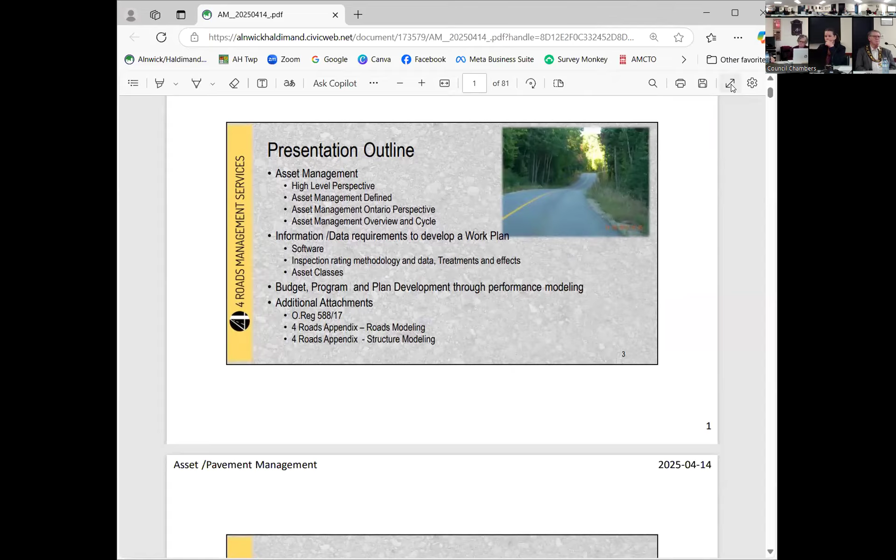Some municipalities I've done very frequently. I think Durham Region might be 17 times, Halton Region 15, Clarington 6 or 7 times, and so on. So the smallest municipality would be 4 kilometers, the biggest would be 2,000. So I've looked at and worked on all kinds of different sizes of asset groups. Dave, who would be your 4-kilometer municipality? A little place called Kerwood down in southwest Ontario, and I think it's still in Lambton County down there. And I was in Petrolia just last week, so they've been a client for a while.

So today we'll talk about a high-level asset management perspective, define it, look at our Ontario perspective, and we'll look at the overview and the cycle. We'll talk a little bit about software, and I know you've got software. Inspection, rating methodology and data, the treatments, the effects, asset classes, budget program, and plan development through performance modeling, which is really how do we develop a work plan and develop that work plan in accordance with Regulation 588/17. I've got additional attachments there, which I didn't send this time, but I can provide those. You've probably all seen O. Reg. 588/17.

And Dave, if you remind me, I'll send those other two. I might have sent those to you and Stefan earlier this year.

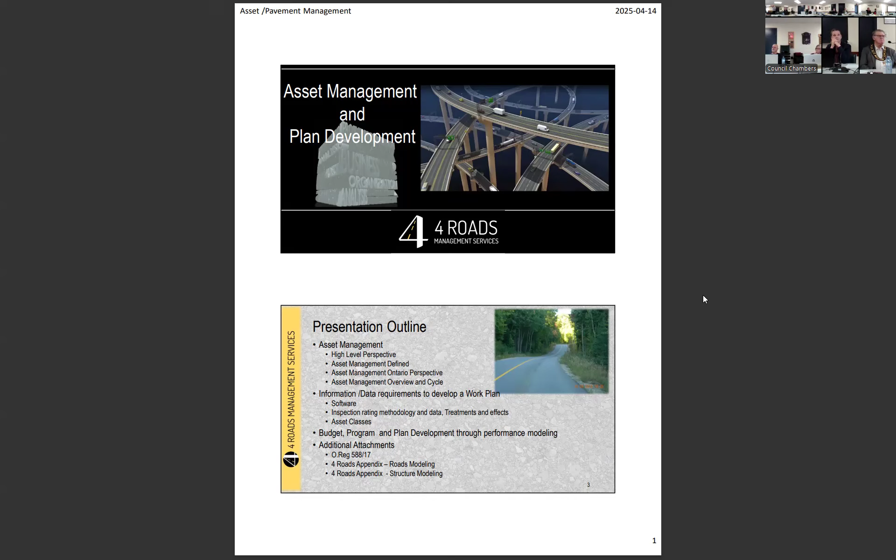So what do we do at municipalities? We are in the business of delivering services, and service delivery is dependent upon assets in good condition. So basically you have roads, bridges, water, sewer, rec facilities, offices, depots, ball diamonds and fields and things like that for soccer, fleet, parts, etc. So maintenance of good assets in good condition is critical to ensuring our service delivery, and almost every aspect of service delivery falls under that asset management umbrella.

So many different agencies have many different definitions, and at one point I had about 12 definitions in this presentation. I never ever read them all, but the point was just to illustrate the commonality between them. So I've settled on this one. It's from a while ago, 1999. Spoiler alert, there is nothing really new going on in asset management. All the theories, et cetera, are pretty much founded decades ago.

But the definition is asset management's a framework for making cost-effective resource allocation, programming, and management decisions. It combines engineering principles with sound business practices and economic theory, and provides tools to facilitate a more organized, logical, and comprehensive approach to decision-making. And even although that's TAC that's come up with that, this definition can be applied to any asset.

Of those 12 definitions that I used to carry, there were key themes to all the definitions. It was all about managing, being strategic, effective, efficient. For sure, it's about money, and lots of it, because this is public works, and even recreation facilities are fairly expensive. So it's about service delivery, optimizing our asset life cycle, and risk management on a couple of different levels.

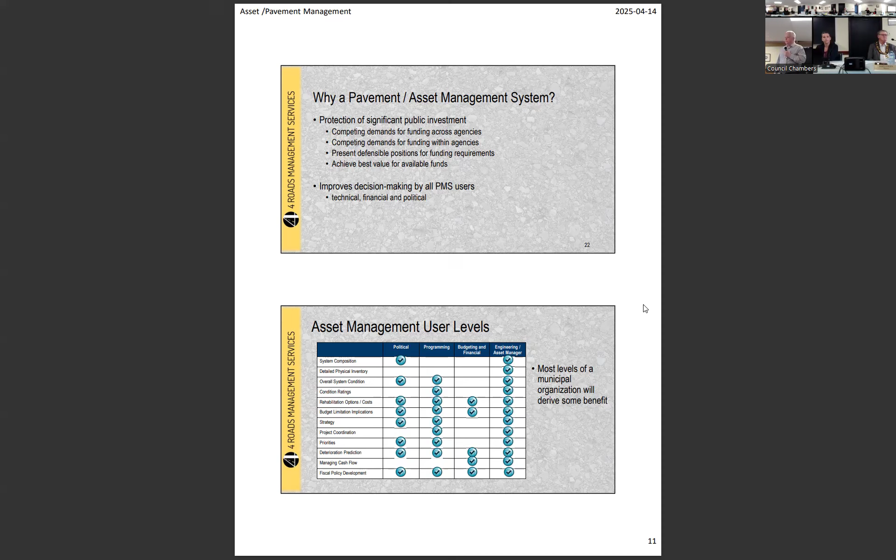So that should improve our decision-making by all pavement management system users, from a technical, financial, and political perspective. So asset management affects all of us in maybe different ways, whether it's political, programming, budgeting, financial, engineering or asset management. And we look at these details down the side: system composition, condition, strategy, coordination, all those things. So basically, most levels of a municipal organization will derive some benefit from having that system. Another spoiler alert, it does take a lot of hours to set up the system.

So the software that I use, just the deterioration curves and performance modeling part of it, I stopped counting at 120 hours. So that's how much effort has to go into a software that already works. And I did the same in another product called Deighton dTIMS, or people that work with me, we were doing it in parallel. The point being, it takes significant effort on this type of software to make it functional for your purposes.

Asset management is current and future costs. PSAB, you probably hear a lot about, and we talk about PSAB, and PSAB is completely different from asset management. If we looked at it, PSAB is looking backwards and historic, and asset management's looking current and forward.

If I looked at a tandem dump truck purchase, and Stefan's still here, he'll see that this number's significantly different than you pay now. I think you're in the 400 plus range, but from the vintage I prepared this slide, 250,000 made some kind of sense. But for simplicity, if we started to look at what that costs, we got our purchase costs, and we got 1,000 hours of use a year, 10-year life cycle. That makes the numbers easy.

It's $25 an hour for capital depreciation. At the end of that life cycle, there's $250,000 in reserve. That's a problem, because even with 2% inflation, it'll be worth about 305,000. So we're 55,000 short. So it just kind of reinforces the idea you got to have an equipment rate, and you got to have an appropriate equipment rate, and you got to adjust it every year to account for inflation.

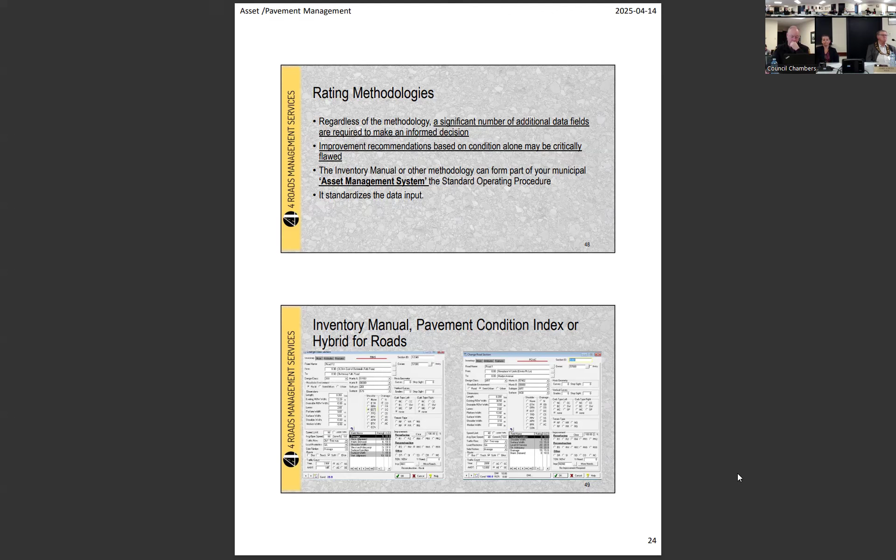And so we have the detail on the types of defects, and then I can put in the ride condition rating, and then I roll it backwards and it produces a structural adequacy, so I can enjoy the detail of PCI, but also have all of that other information, the lanes, the length, the width, what kind of curb I have, what kind of shoulder I have, all that kind of stuff. We need to have that kind of information to make a valid decision.

So if I use an example, and I know I'm harping on it a bit, if you had a PCI of 70, which would be a structural adequacy of 14, typically that's a range you do a resurfacing, but if the road's too narrow, it's a reconstruct. If there's no drainage, it's a reconstruct, unless you want to use just a single lift of pavement for a holding strategy. If there's a capacity need, then reconstruct with additional lanes. If the underlying data is all fatigue related, then a more significant rehab is required. If it's age related, it's a different fix. It's similar with structures. Asset management and improvement recommendations using a single parameter is critically flawed.

Here's a number of methodologies that are in use in Ontario. And PCI methodologies change with the surface type. So SP-021 is for surface treated. That's a generic pavement condition for municipalities. 24 is for hot mix and 25 is for gravel. So depending on the surface material, you get a different rating because different materials fail differently.

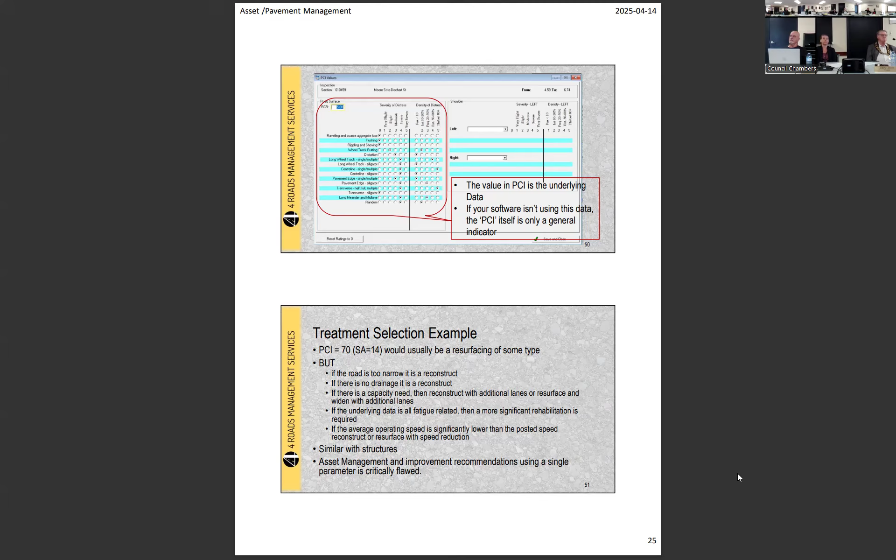So you have surface treated roads and you have hot mix roads. When you drive down the hot mix road and it's thump, thump, thump, you notice you don't really get those on surface treated roads. It cracks longitudinally. Hot mix cracks thermally. That's just physics in action. That's not a structural problem. That's not a bottom-up problem. It's a top-down problem. It's age-related. So that twigs in your mind. I don't need to fix anything under that. I just need to fix the surface material.

It's a prediction model. So if you have a road that's 6 to 10, what it's saying is in 6 to 10 years, it will be a broken road. That's what that means. So that interpretation gets confused a lot. It doesn't mean resurface in 10 years. It means it will be broken in 10 years. So there's quite a little bit of difference there. That is the language we're stuck with. People do have it in their heads, but when you put it up on a graph, you can see what it really means, right?

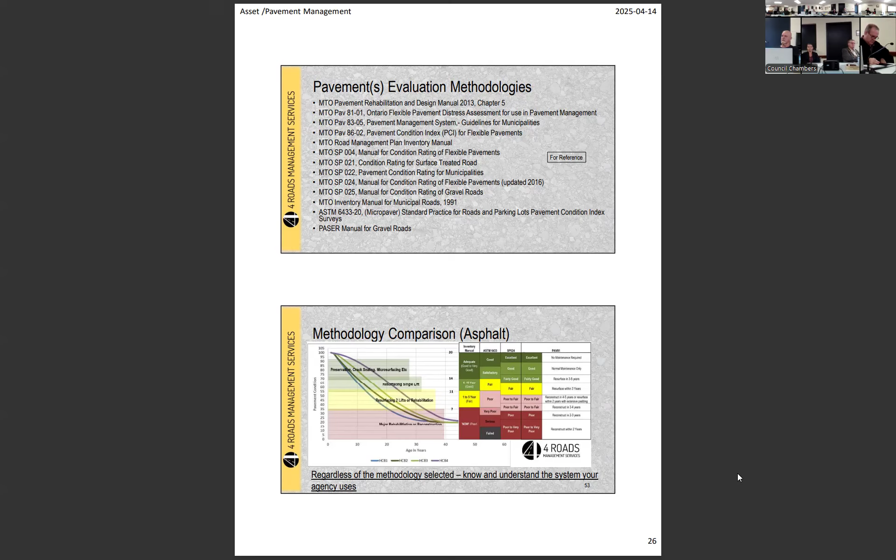So, methodology comparison: surface treatment, there's a few less variations there, and they're pretty similar. And there's 3 or 4 different gravel ones. This is what the inventory manual does, and it makes all kinds of sense to me. So basically at that top end of the curve, we're doing regrading and dust control. We get down a little bit, we're just going to add 75 mils.

Condition gets a little bit worse over a longer period of time, we're going to add 150. And when it gets down to here, if we've done nothing, then we've got to do something major, like add 300 millimeters of gravel. We use OSIM or MBADES. MBADES is like OSIM light, not used so much anymore, but we use that for structures.

Sadly, these are structures that I owned. I closed this one 3 weeks into Haldimand County. Somebody called me and said, Dave, I know you just inherited this, but you've got to look at this beauty. And I did. And there I am, January 20-something, standing under a bridge at 9 o'clock at night going, yes, indeed, somebody did try to burn it down.

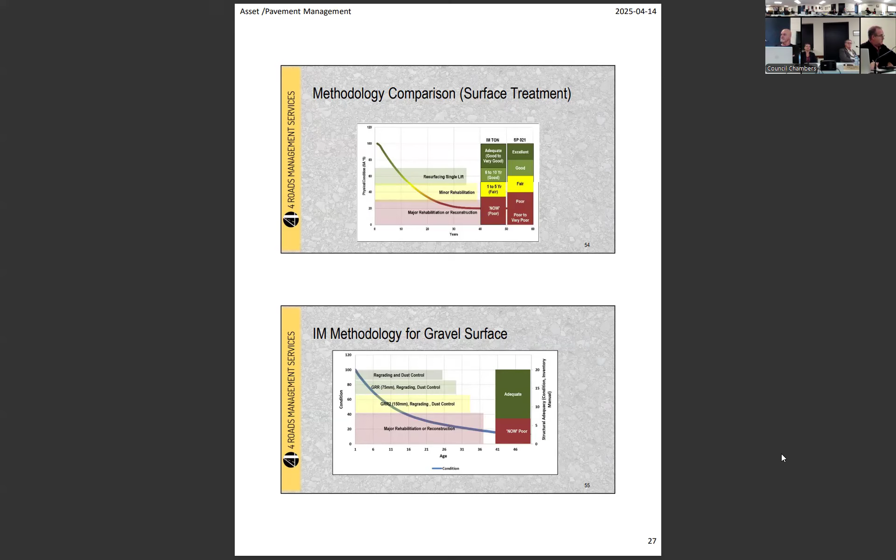So the story was they tried to burn it down. They closed it for 2 years and they opened it and they didn't fix anything. And in January, I got my flashlight going, yes, this is charcoal under here. So I closed it that night. This was a bridge that was posted at 2 tonnes. 2 tonnes, it should just be closed.

If you've got a Toyota Corolla and 4 guys my size in it, it's 2 tonnes. Just saying, to give you a perspective, a Ford F-350 fully loaded is about 6 tonnes. So 2 tonnes is close it for safety reasons right away. Another one of my beauties just held together. And this was a bridge that was posted for no trucks.

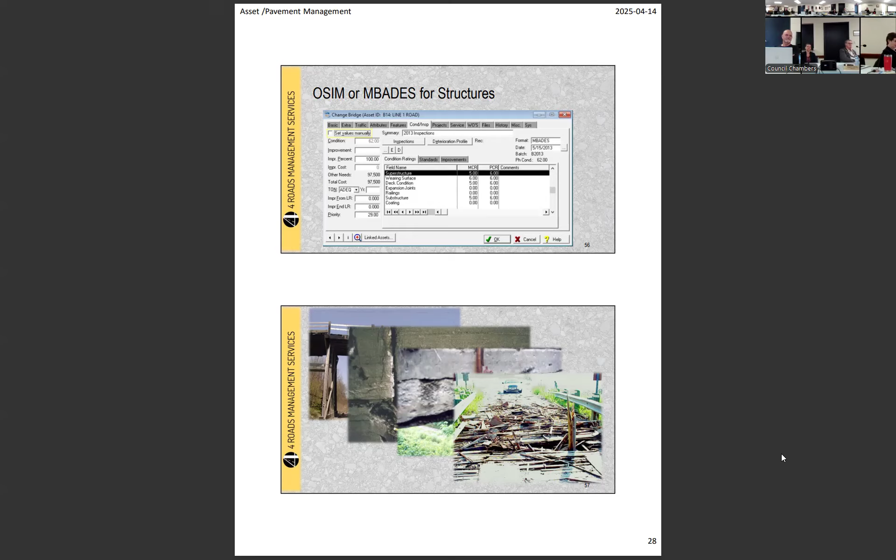And we think it looked a little bit like the Bugs Bunny Roadrunner hour when the guy went across. We think it was an overloaded vehicle that went across that. And that is the police car at the far side. We suspect the wood broke up just as he drove by, you could see it going on. So, PACP or WRC for sewers, standard rating methodologies.

So every asset has different methodologies. You as an agency have to just say, here's what I'm going to do, here's how we're going to do it here. So it's important to get accurate condition data because you're going to make multi-year, multi-million-dollar decisions based on that data. If you put garbage in, you will get garbage out.

So the reviewer should have a sound understanding of what a structural problem is versus non-structural. And I just gave you that example of the thump, thump, thump going down the road, it's not structural, it's just age. Dave, are you finding that some municipalities come across a problem like a bridge? We talked about this in one of our meetings. They don't have the money, and are municipalities just closing the roads because the bridge is gone and they don't have money?

There are a couple not far from me that have done that. One I did the gravel road inspection for a couple of years ago, and they had 15 bridges that were closed. Now, the big problem with that is primarily emergency service delivery, right? It messes up your winter control, which is sort of an emergency. But if you have police and fire and ambulance, et cetera, and they can't go over the bridge and it's another 5 or 10 minutes to get there, that's a prohibitive cost. So you really have to be conscious of those.

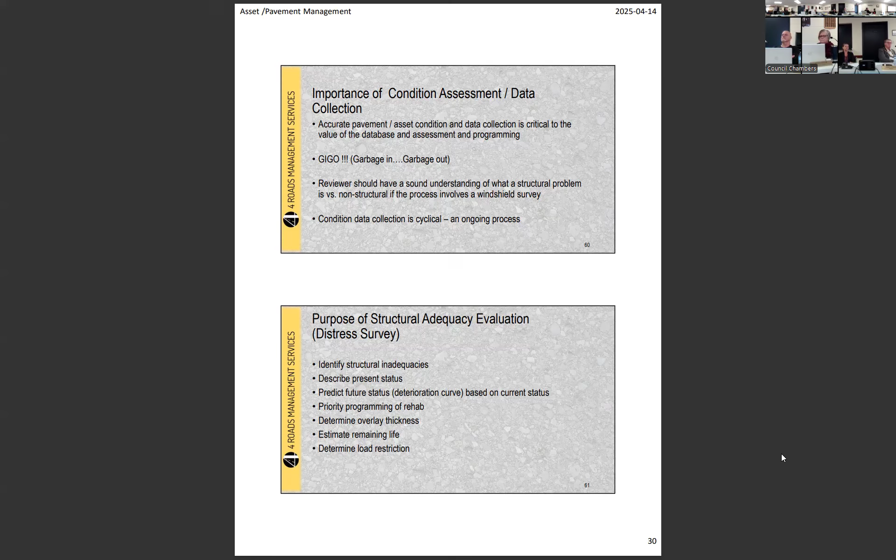Yes, the condition data collection is cyclical and it's an ongoing process. So what we want to do is identify the structural inadequacies and describe its current condition. Based on its current condition, we can probably tell you how long it's going to last. We can prioritize the programming of a rehab or a reconstruction, determine the overlay thickness, determine the remaining life, and determine if you need a load restriction. Plan and program development is dependent on that accurate data and costs. Data collection should be conducted by trained personnel.

So I'm sure that's a cutout from the 60s because I haven't seen a guy with a hard hat and a tie for quite some time.

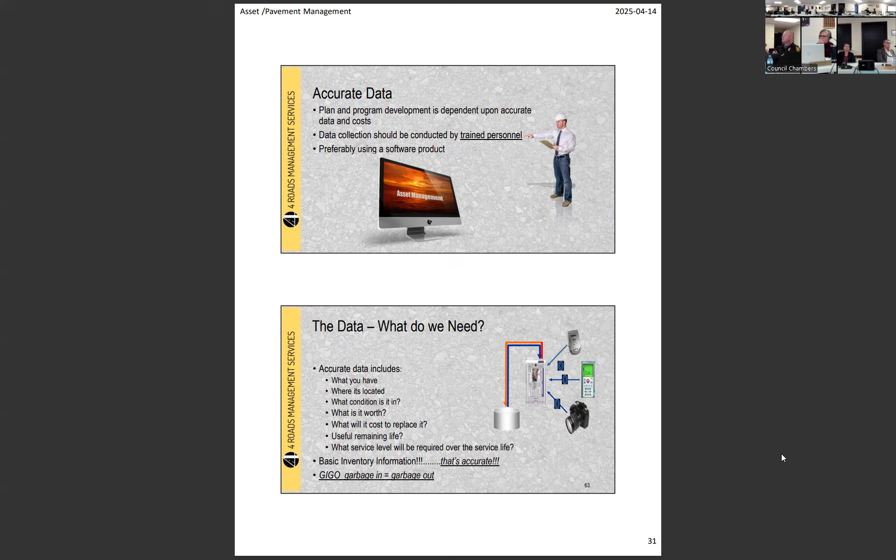Preferably using that software product. But what do you need? Once you're done, you're going to have a bunch of standardized questions answered for you. You'll know what you have, where it's located, what condition it's in, what it's worth, what it costs to replace it, what's the useful remaining life, and what service level will be required over the service life. It's basic inventory information that's accurate. And again, if you put garbage in, you will get garbage out.

Data collection is the root of good asset management, and it's a measure of current asset condition. It has to be collected efficiently. It has to be objective and accurate. And maintenance and rehab feedback is important to the analysis. So when I go to a new system I haven't done before, the first thing I want to do is talk to the operations people. I want to know where water is over the road and how deep is it? Like, can you still drive through it? Or do you close the road? Because that will make it a 1 to 5 or a now need for drainage.

I also need to know about gravel roads. You really have to look at them during spring breakup because they all look okay in July. So if I'm not looking at gravel roads in the spring, I need to know what the operations people are going to tell me about how that road is breaking up in the spring breakup. Where are your bad spots?

As I alluded to earlier, as you get into this, don't go overboard with massive amounts of information because it's just data that might be stale dated by the time you actually need it. So get the core, get the basics, get that information in place, and then you can continue to supplement that. Editable by few, repeating theme, preferably only in one location. You do have to have an ability to extract the data into a spreadsheet or something, so you can do maybe a little bit further analysis. It could be in a cloud, it could be on a server on site, or with your software.

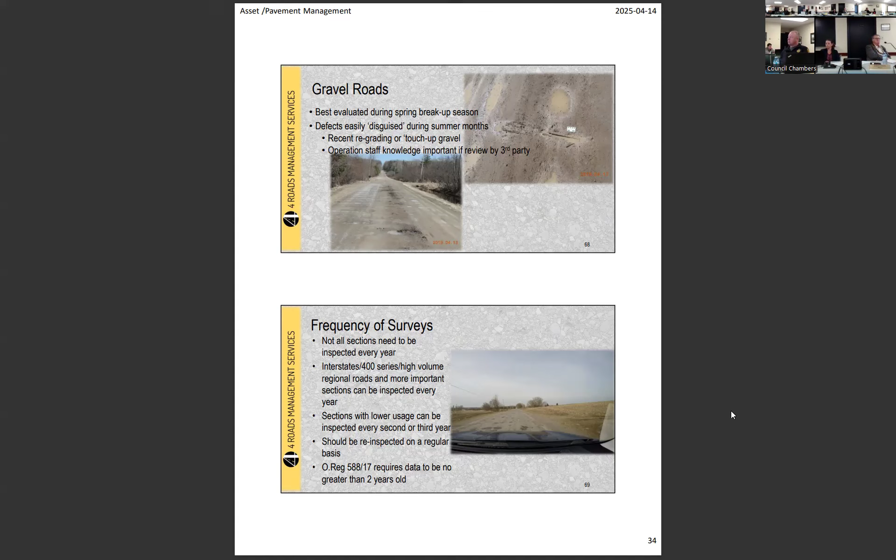This is important to note because that information, if you have an accident on a road, that's what comes out in court. Lawyers still use the inventory manual because they have listed in here minimum tolerable standards for road widths. The minimum tolerable standard for shoulder width on a rural or semi-urban road is a half a meter regardless. But you have minimum widths for the various traffic counts on the roads. So I think that's important to keep in mind because I have been called by lawyers asking those questions. How would I interpret this?

So one of them was a low volume road where from the edge of the rounding to the edge of the rounding was 5 meters. So the first lawyer's question was, how wide would you say that is? And I'd say it's 4, because you have a minimum tolerable standard of a half a meter for a shoulder, so it's 4 meters wide. The minimum standard, and I know I'm getting a little bit too complicated here, is 5 meters plus the half meter on either side for a low volume road. So then the defense lawyer called. This was all within a 24-hour period.

He said, well, I'm going to tell him it's 5 meters wide. And I said, well, I just talked to this guy within a day. He seems fairly sharp and he understands the manual. So you tell him it's 5 meters wide, because he's trying to say, oh, our road width was fine, it was a driver problem. And I said, the other guy's pretty sharp. He's going to tell you, sure, you can have your 5 meters, but my client went off because there were no shoulders. It's using the manual against them kind of thing. So I think that's really got to be kept in mind. That field audit and the accuracy of the data that's there.

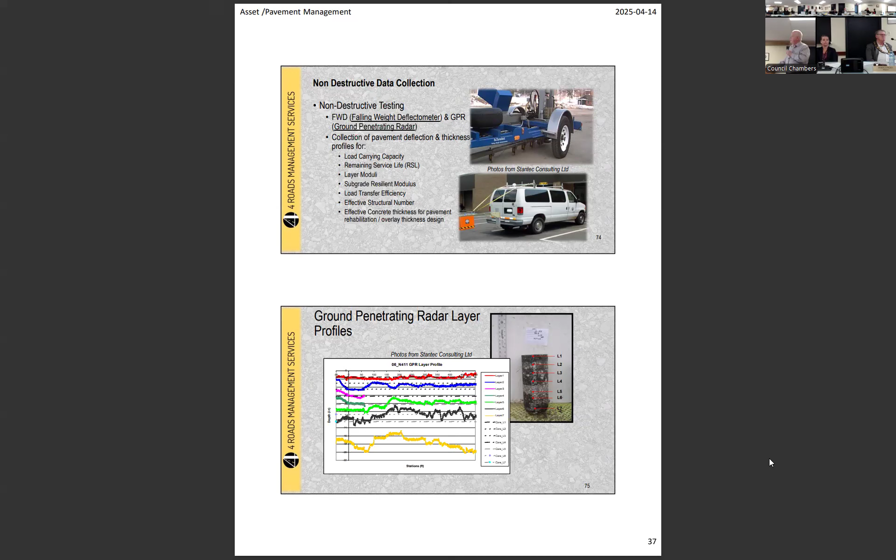This is the ground penetrating radar. That's obviously a core. And that's how the falling weight deflectometer actually works. It drops that weight. There are 7 geophones, and you can see the deflection is different. The allowable deflection is different depending on the type of road it is. So if it's a high volume road or truck route, it's going to have very minimal deflection, but on a local residential road, a greater amount is

permitted. Just from an acceptance perspective, when I worked in Ajax, it grew from 19,000 to 55,000 people in the 5 years I was there. And we started to use the grandfather of this tool, called the Benkelman Beam, as an acceptance tool. So it would be, I'm not going to accept your roads if they fail the Benkelman Beam. So it was an acceptance criteria: build it right or we're not. And that brought the quality of the roads up quite a bit.

Excuse me, Dave, again, you're talking about paving roads. So we have county roads and we have our municipal roads. Yep. And I'm just kind of going up and down the roads. And I guess I could ask you this, Dave, what paved roads do we have? I don't think we have any, do we? I think you have in one of your databases quite a few kilometers of hot mix pavement. So that would be the same thing. Yeah, hot mix asphalt, and that's not on a county road. In the information I've looked at, you do have surface treated like tar and chip, you do have hot mix asphalt roads, and you do have gravel roads. Thank you. In Grafton, there are some paved roads.

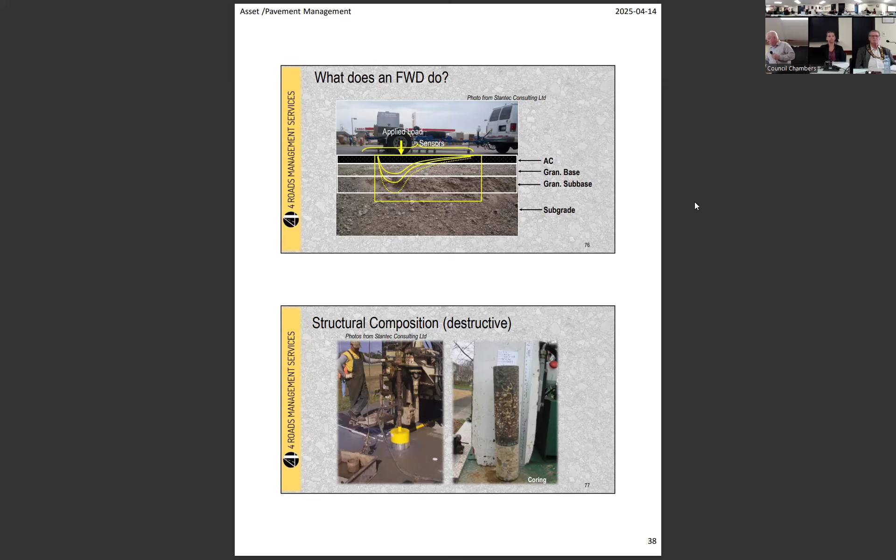So when we're out looking at any asset, the segment condition is established through whatever rating methodology we choose. The improvement needs are established through the evaluation process, and the system rating can be considered that level of service measure. So we talked earlier about system adequacy, and now we can talk about what's the average.

Well, if I took the average of all the ratings, that's going to be misleading potentially, because if I had a short length of 100 meters, and you probably have some section lengths that are 2 and 3 kilometers long from intersection to intersection. If the long one scored 100 and the short one was 100 meters, it scored 50. The average is 75. That's not really representative.

So what I usually do is I do the average of ratings weighted by the length. So then I would take that 100 times the 2 kilometers and the 50 times the 100 meters. So then your average is going to be in the 90s somewhere, not 75. So I think that's better.

And that system adequacy, I alluded to it earlier. There wasn't a slide on it, but it's the ratio of the fair, good, and excellent assets to the entire system. That measure as a standalone measure can be very misleading, because if your trigger for a now need or a poor road was 35, if all of your roads scored 36, you're 100% adequate. And next year, you will be 0% adequate.

So when you're doing your policy and you're updating your policy and you're talking about level of service measures, every asset may have more than one level of service measure. The ratio of good to fair roads, like which roads are in that certain condition, it's going to paint a fuller picture of what you want for your municipality.

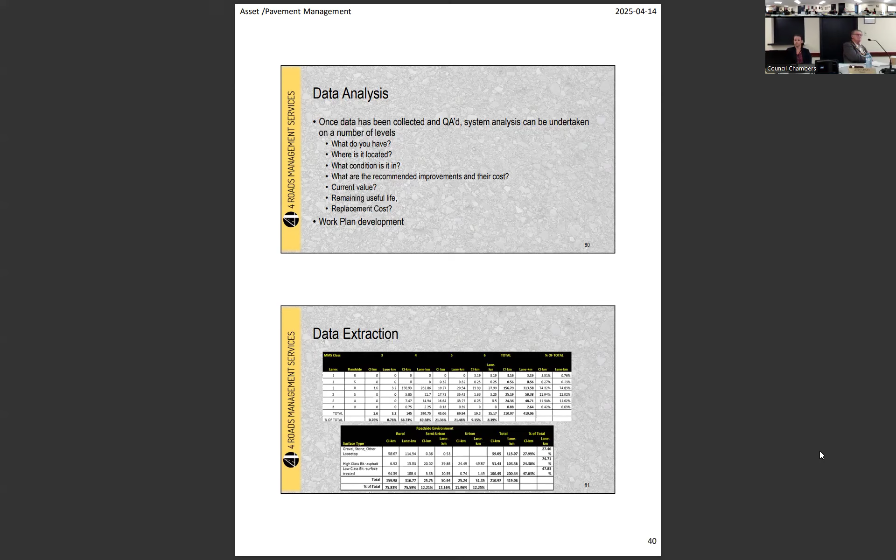I can go further with the information and start to look at that good to very good measure. I know it doesn't show up there, but I think you have the PDF for the handouts for this, so you can start to look at good to very good. If your consultant has done your system several times, then you can start to look at, oh, how are we winning or losing? Here's what's happened with the structural adequacies over time.

And you can see here in this particular system, from 2013, we've moved to the left, meaning the road system has got poorer over time. So with those kind of measures, if we're using the same rating system and we're doing it on a regular basis, we can now see if we're winning or losing. So in this case, we're losing.

It's the same as the previous slide, same system. But once you reach a certain level, it takes quite a bit to make it even worse. But when we're looking at it being at 70, and then in 2010 it was 53, and in 2019 it was 43.8, we're now starting to see that we're not spending enough money. The conditions are getting worse.

And this is the hazard. If you're going to set your level of service at a certain level, if you set it too low, then your maintenance costs are going to be really high. You might have cured a capital problem, but you're all going to be getting the calls: I need this pothole fixed, or this is bad. So there's a delicate balance between where you want to be with your level of service in terms of the condition reading.

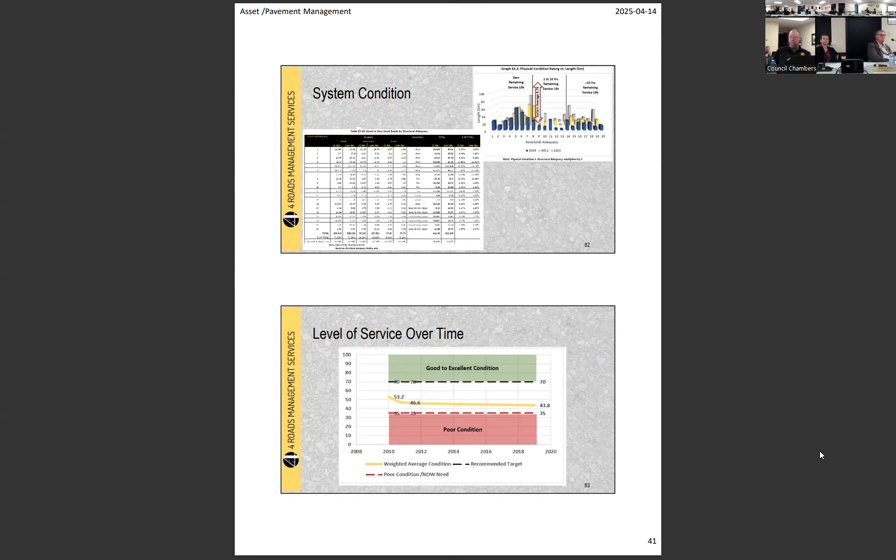I can maintain the system. The hazard with maintaining, in that model, is it looks good: we're at half the cost of capital depreciation. That half cost means you are not going to be doing any reconstruction. You are only going to be surface treating, only doing gravel road resurfacing, et cetera. If you like the $500,000 but then want to turn around and do construction, your system will deteriorate over time. So yes, it's appealing because it's half, but it only works if you do the right treatment at the right time.

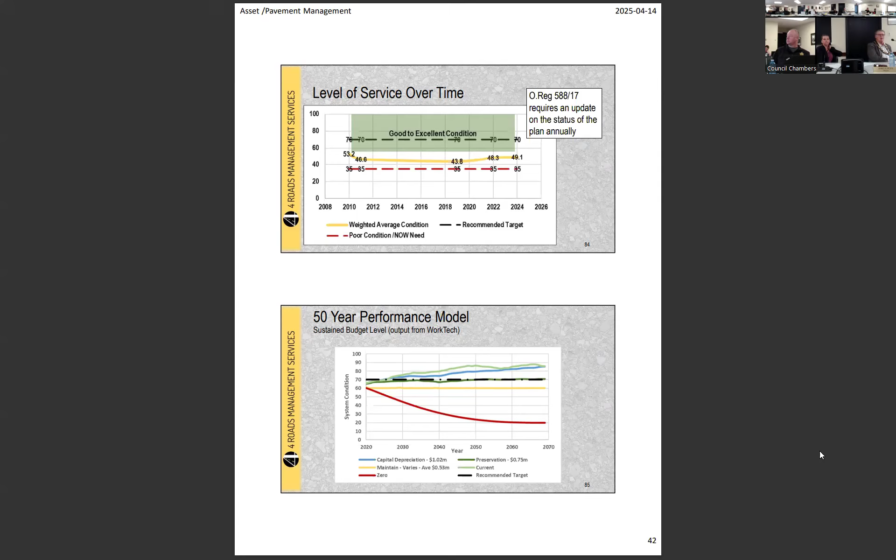And that's a perfect world. We don't live in a perfect world. So we run a model, and the first draft is what the computer says. Then there's, oh, we wanted to do this road this year. I call those committed projects. I can plug in that project in that year. If you're going to reconstruct it, it's going back up to 100. If you resurface it, it might go up to somewhere in the 90s, depending on its existing condition. So we can get the same performance with your budget and the committed projects.

And I like to do that because I often worry about the province saying you're not in compliance with the regulation, which is fairly easy to not be in total. The key theme of the regulation is to keep the assets at least in the same condition. For instance, I'm dealing with one client right now with a 1,100-kilometer road system, and the thrust of their projects and programs is driven by the water and sewers.

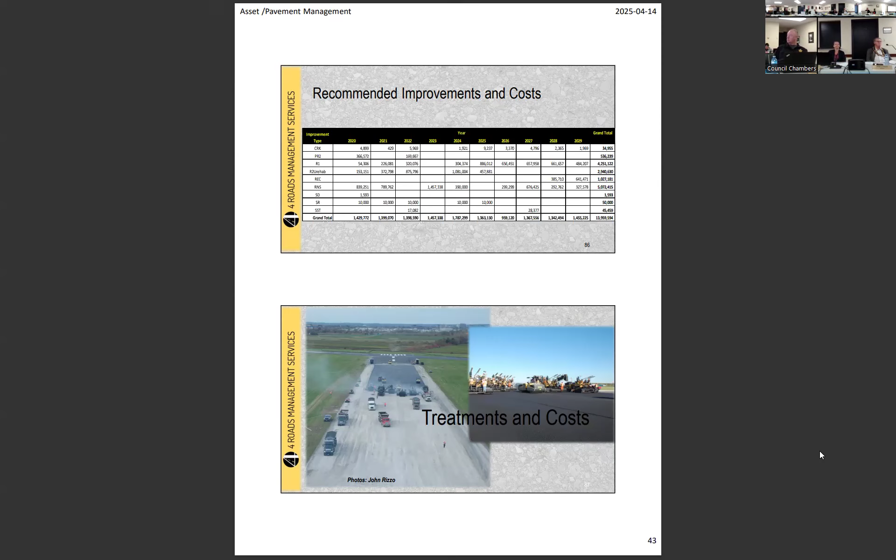So when you're starting to talk about dollars in simple terms, it probably costs you 4 or 5 times as much to reconstruct that urban road versus the rural road or repave it. So you can balance it off that way. Treatments and costs. So understanding the treatment effect will translate into a return on investment and give you that area under the curve. It's very useful for program development, and really what the regulation is saying, that the work plan be developed using the lowest life cycle cost activities, is really the best return on investment is project selection.

So each improvement type is going to have a different effect on the asset. Crack sealing doesn't improve the road. It maintains the condition or holds the condition. Resurfacing will increase the condition, but it doesn't become perfect. So if you paved it at the exact right time, like a 70, it might go to a 95. If you pave 2 lifts at a lower condition, it's going to bring it to 100, and so on. So those are the kind of things that we have to keep in mind with our project selection, and gets back to your question about the effectiveness of a treatment. So that's what we build into that.

So we have our cost components, and then there's the effect on the asset. What's the treatment? It's going to bring it back up to 95 in this example, and it's an R1. In the R1 paving, a lot of times you hear the mill and pave. Really, you should mill it and then do base repairs and then put another lift on top, because an active crack will come through at about 25 millimeters a year, 1 inch a year. If you pave on top of an active crack, you're probably going to crack in the same spot in 2 years. So those are the kind of things to keep in mind.

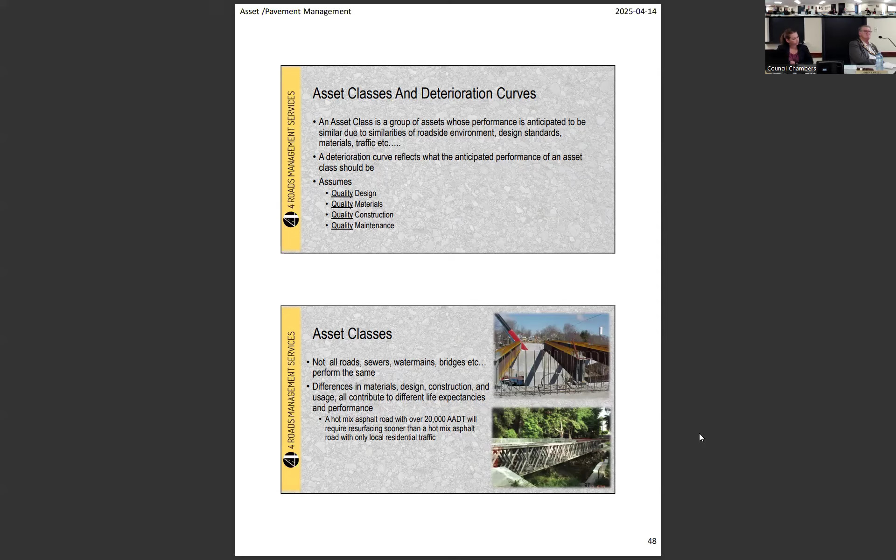Deterioration curves will also vary. Documenting and understanding how agency roads have performed over time will produce a reliable deterioration curve that might be specific to your agency. As I said earlier in the presentation, it took me over 120 hours, that's when I stopped counting, to set up my performance modeling and the curves. So I looked at TAC, which is a great resource. And what I saw was missing here is I have local and collector and arterial roads, which is great, but it doesn't specify a surface type.

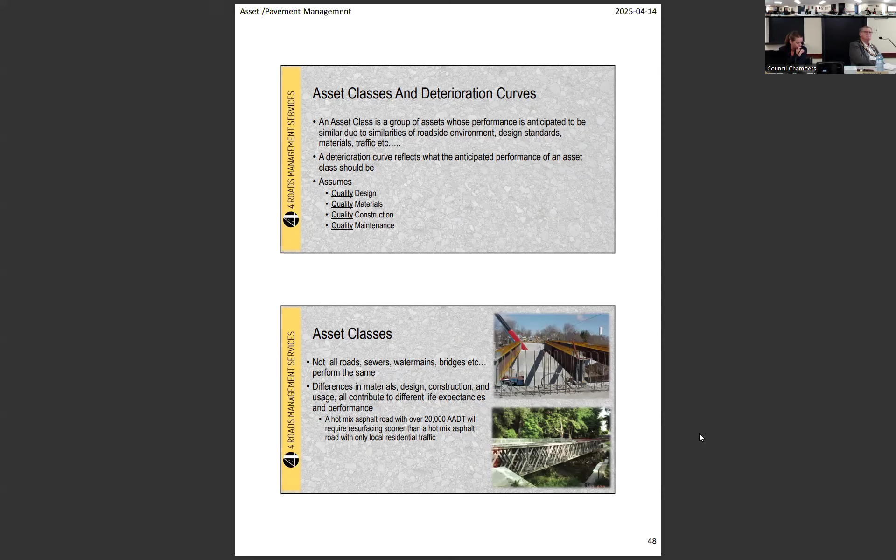A surface type is going to cause me a bit of a problem because the replacement cost is going to be very different with the different surface types. So then I looked at my all-time favorite, the inventory manual, same thing. It classifies it by traffic in the rural and semi-urban sections and urban sections, but there is no definition there of what the surface material should be. So we've got all these possible surface materials, these roadside environments, then all these subtypes in the manual, which would result in 400 combinations. And I said, I'm not building 400 deterioration curves.

So I slimmed it down and said, what I really need is the surface material, a roadside environment, and then I refined the traffic a little bit. So I did asphalt over concrete, RSU, so rural, semi-urban, urban. And you can see I got a lot of HCBs, high-class bituminous 1, 2, 3, 4. They have different curves. The rural and semi-urban will have different replacement costs than an urban, but the deterioration will be the same. Once these are set up, it's automated. You can automatically assign it to an asset if you have the surface material, the traffic count, and the roadside environment.

So that's an asset classification for performance modeling or capital purposes, but we also classify roads for different purposes. So we have Regulation 239/02, whose classification is predicated on the traffic volume and the speed limit. And that's changed a few times. I was on the committee that wrote it from 2007 to 2010. Then we were recalled in 2013 because of the Giuliani decision, a lawsuit to deal with ice on the roads. But that defines what your service delivery should be based on the traffic.

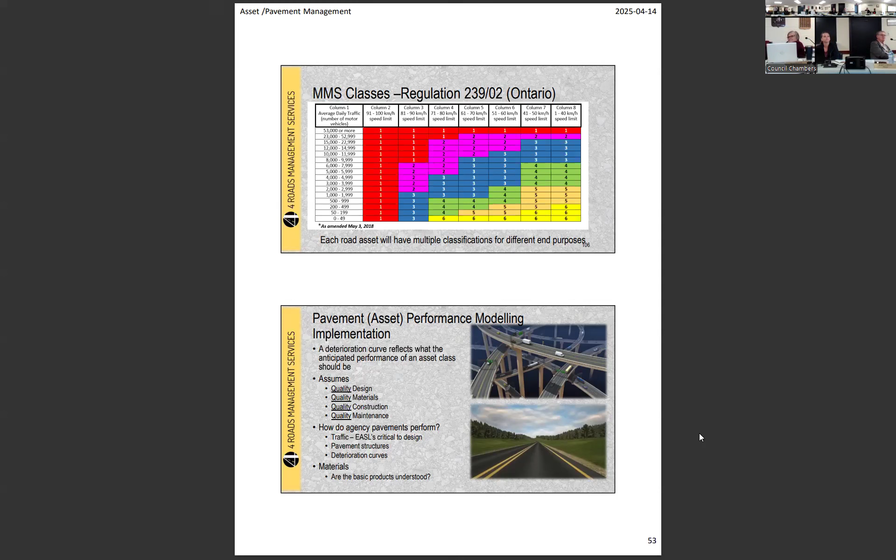Never. Never. Every 3 months. Isn't it? There we go. My God, we have like 5. But when you read the manual, it's either or. It says a mileage or time.

So that's why you've got to have, and it goes back about 50 slides or so where I was talking about, the person making the asset management decisions has to know and understand the characteristics of the asset.

So you actually read your owner's manual. Yeah, but I don't follow it. But you knew it. I know it.

So performance modeling based on pavement condition alone works well if the other defects or potential defects are satisfactory, if the drainage is okay, the alignment, the widths, platforms, et cetera. For most DOTs and MTO-type organizations, these things aren't near as big a problem as they are for lower tiers. Most regions and counties aren't too bad that way.

But your municipal roads, and this might be the subdivision that you referenced, built prior to the 70s and 80s, growth may not be well documented and might not be constructed to a standard. So that is what happened in a couple of places I worked, those older roads.

So you've got to talk about cross-asset integration. I mentioned it earlier. The road allowance is really a utility corridor. It's water and wastewater, gas, hydro, sidewalks, and bike paths. A road that requires resurfacing from a pavement perspective only may end up being a significantly different project once you hear from all of the stakeholders.

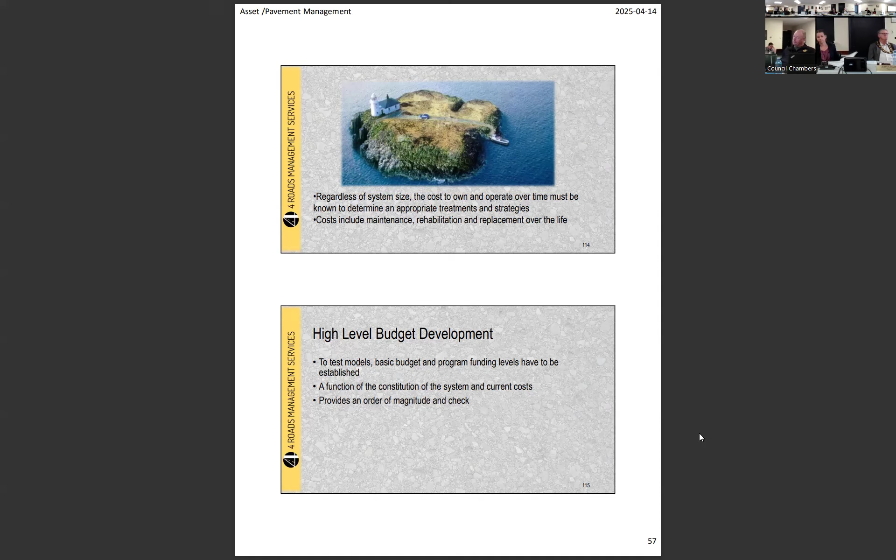So we had a slide there that said, I need this information for budget. I need this information to prioritize. So how many kilometers of each kind of surface type do I have? What's the average life expectancy? And that's going to depend on your system, the original design, et cetera, and your maintenance. We need those same unit costs that we talked about earlier.

And for instance, this is what we call maybe a standard calculation. If we looked at what we're going to do in a rural or semi-urban road, we're going to do some fixing of the base, and we're going to do 20% padding. In an urban area, we're going to look at curb and gutter and manhole adjustments, et cetera, to be part of that process. And importantly, what we add.

And so my estimates may be higher than other estimates because we've included a basic construction factor, an engineering factor, a contingency factor, and a terrain factor. And they are added to the material costs, which is more typical. Again, it gets more complicated when we get into an urban road system. It could be as simple or as complex as suits your agency.

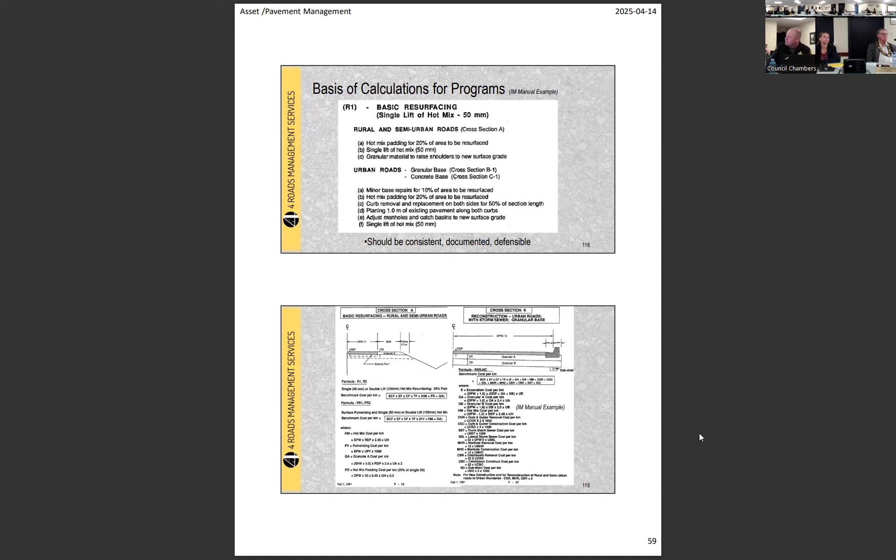So we could look at your overlay program, could be as simple as how many kilometers of hot mix do we have? What's the average cost to resurface a kilometer and life expectancy? Again, for simple numbers, I use this: we had 500 kilometers of hot mix, $150,000 a kilometer, which is from a few years ago. Life, 20 years, which isn't real, but it makes a nice round number of 3.7 million.

So you should use a similar process when you're looking at your bridge and culvert inventory. So the capital replacement, for you guys, you can get your database from the consultant that did it and then start to look at what's the deck area. And you can take that deck area and say, it's $12,000 a square meter. Here's the replacement cost. It will last 50 years or 75 years. That translates into an annualized cost.

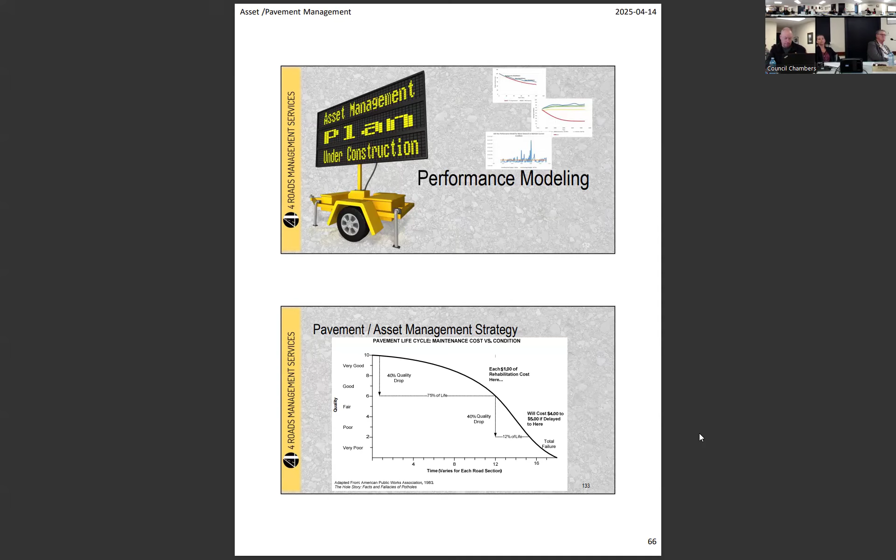So I was doing this presentation probably 12 years ago, and the finance officer said, here's what you're saying. You got to use this picture in every one of your presentations. So I do. So that is the message delivered. So if I'm at this end of the curve and just want to put down 20 or 30 or 40 millimeters of asphalt, I'm wasting my money. It might be a holding strategy. And if you do it as a legitimate holding strategy, that's one thing. But if you think that's fixing the road, it's just incorrect. So bad planning is buying a new saddle for an old horse. So we want to do the right treatment, keep those good roads good.

So here's our curve. At the top end of the curve, this is what it translates into: we're going to do gravel road resurfacing, surface treatment, slurry or micro, other preservations. And then we get down to the point of a resurfacing one lift. And then we resurface two lifts, major rehab, reconstruct. But as I go down that curve, I have a decreasing return on investment and an increasing cost.

So the regulation does not say capital and operating. The regulation says spend the money at the right time on the right treatment. So I like to consider everything we're spending, even though that might be operating, as a reinvestment amount. And that's where we really want to spend. If we artificially say, oh, we can only spend so much in operations or so much in capital, we're going to shoot ourselves in the foot when it comes to asset management.

And I'll use the example of a bigger center. If we went to a Whitby or a Pickering or a Milton on the other side of Toronto, and you started to say, oh, we can only spend so much in operating, well, that resurfacing project might be an operating cost.

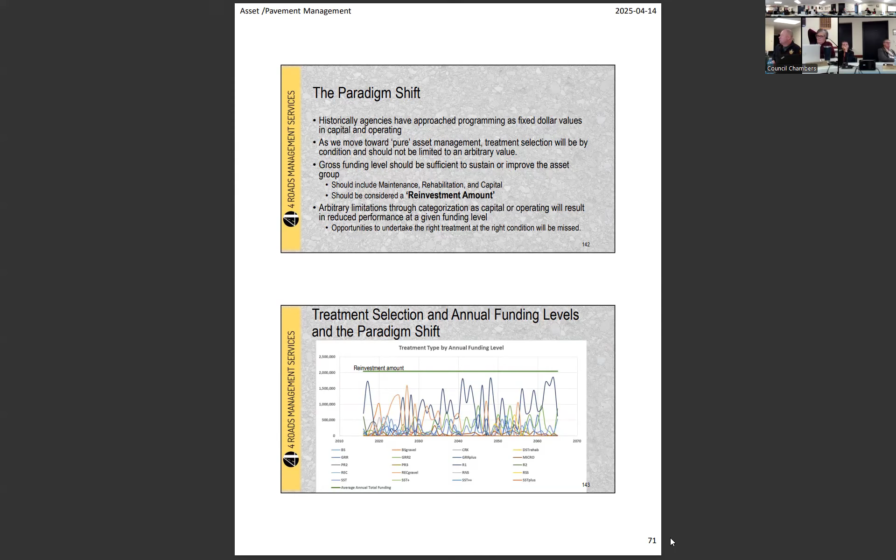So your typical model calculations, I can skew the model in any direction you want. For some municipalities, they want it weighted for condition and the minimum maintenance standards. So we can do that. Return on investment, needs savings, lowest condition, best condition, or I can customize it, as I said, by traffic condition or priority rating. Return on investment aligns most closely with the requirements of 588/17.

Dave, when I see those graphs like that, can you look at all municipalities and come up with that standard graph? Because if you've got the city of Oshawa, their tax base is a lot higher than what our tax base is. So if you're saying 1.5 going to road management all the time, that would be difficult. Because then we would be looking at like a 2 or 2.5 million budget for the roads, which we aren't there. So I'm just wondering if that fluctuates a little bit, or is it a standardization that you're using?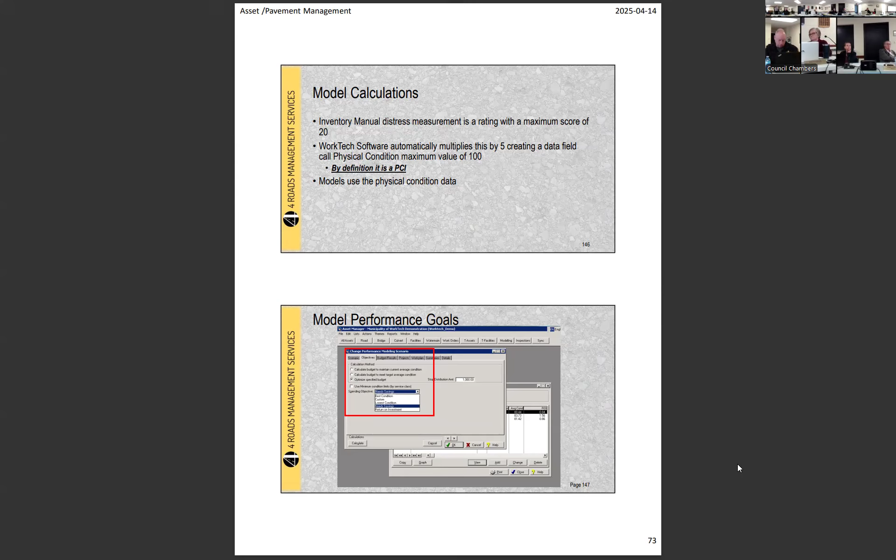So for us, as I said earlier, I just take that number out of 20 and make it a number out of 100. And by definition, that is a pavement condition index because it's a number between 1 and 100. And so I use that information. And here I've got a bunch of tabs across the top. But the drop down here is I can pick customization, best condition, worst condition, or return on investment. So a lot of the softwares operate in a similar fashion. I can also customize it a bit and say, I don't want to exceed this expenditure for a given activity in a year. And that's the output that we get.

And the output I've greyed out here so you don't know who it is. But you can see what the model does is it's got a check mark that it's selected as a preferred project. That's one that should be in your budget. And it does billions of calculations. So it calculates every treatment for every road for every year. And then it picks out what would be the best bang for the buck if I just let it do its own thing.

Here's what you get in an output. It's similar to what we saw before. So you can see a variability year to year to year with different treatments. It's just because it's picking that right treatment at the right time. This is from a real road system. This is their existing budget.

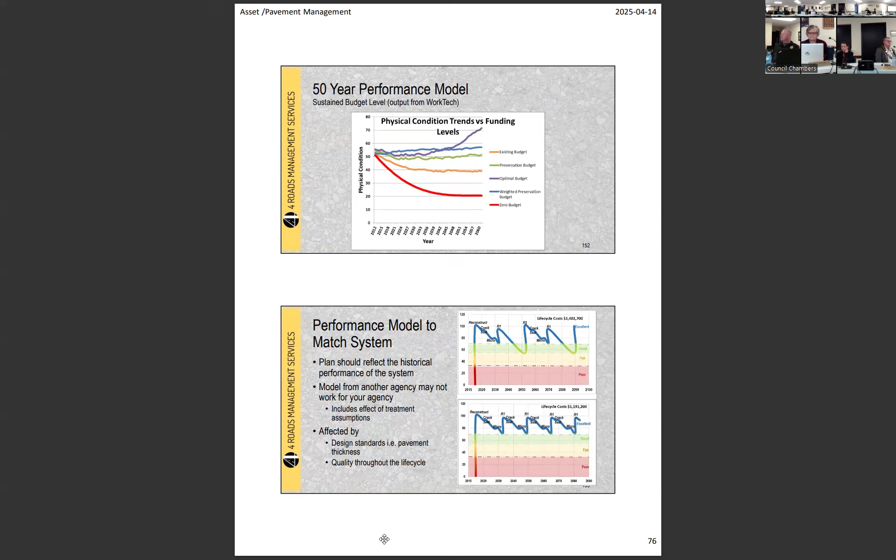And you can see here, I have marginal differences here with the preservation, what I call preservation, which I now call short-term sustainability, and I've weighted it differently. And then if I spend a lot of money, optimal budget, you can see this was in poor condition, it would drop over time, but then it would eventually improve. So that's the kind of things that we want to know. What's the outcome going to be?

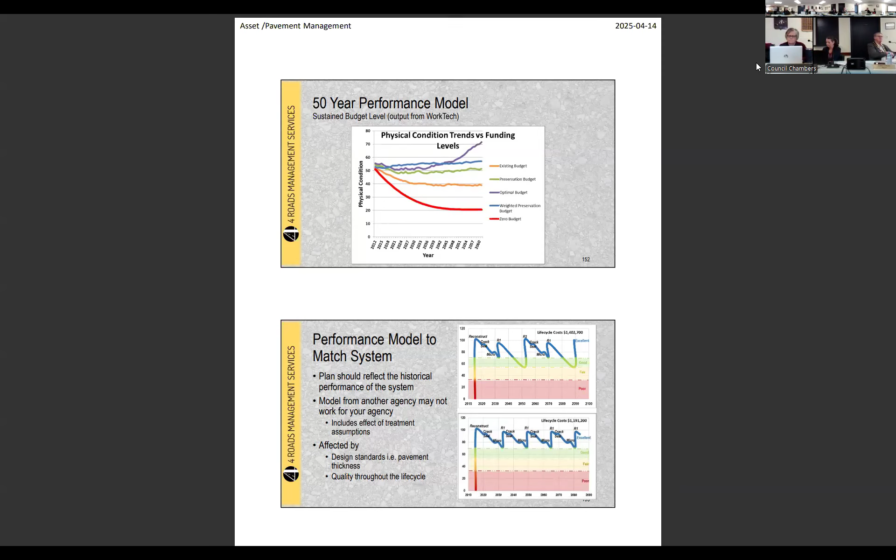We showed this slide before. This is a lower volume system. This is more like a 401 type system. So the performance model has to match what your system says. If I start to talk about water and sewer, we can apply those very same principles for water and sewer. So this is water and sewer combined for a smaller municipality.

And those are graphs repeated from the previous page. Structures can do the same thing. We talked about that a bit earlier. So I want to do the right treatment at the right time. And Dave might recognize one of those slides. Generally, what happens in the model from a pavement perspective is the best bang for the buck is crack sealing, microsurfacing or other preservation, resurfacing 1 or 2 lifts. If these activities are undertaken at the right time and the right condition of the life cycle, then your pavement costs are optimized.

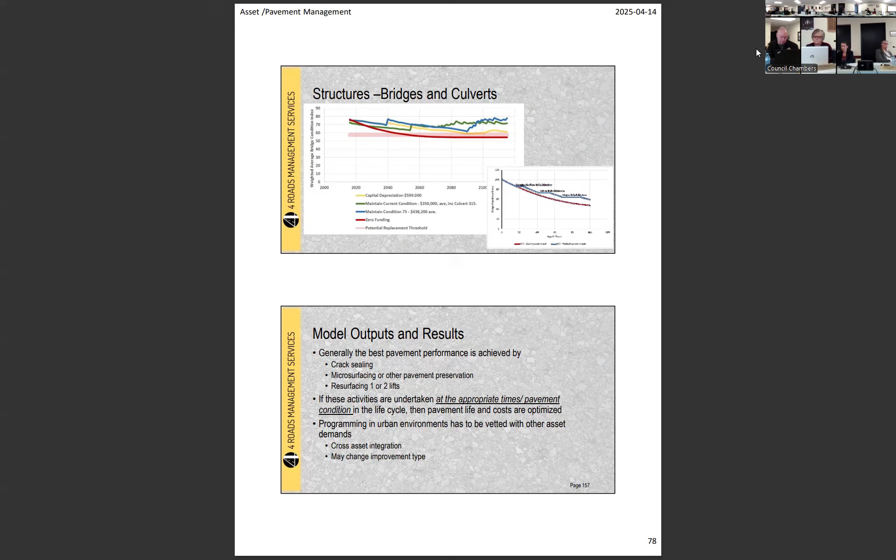And don't forget the team. I usually write this to staff, but the team is other staff and council. So I think the best thing to do is keep in, because this is a huge subject matter. I think the more times you're in front of council, explaining or doing these training things, the better it is, because it's a lot to absorb.

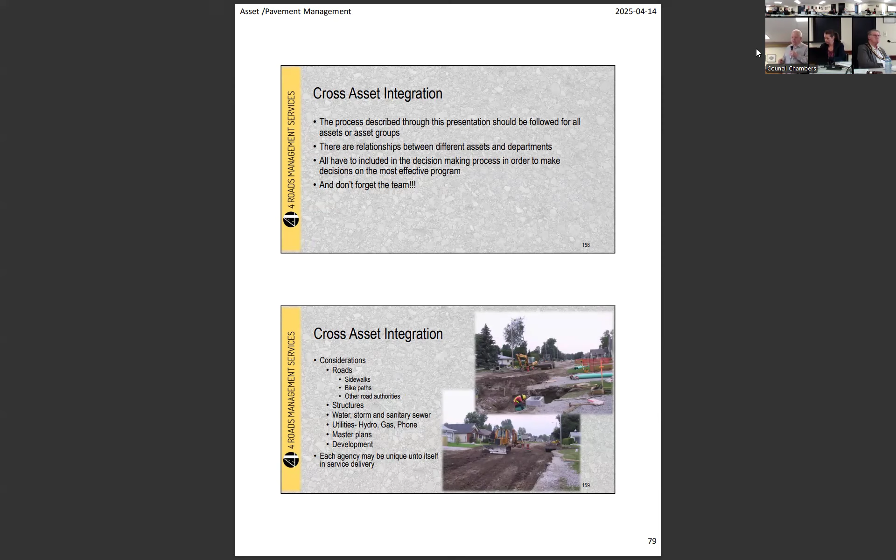Just on the cross-asset integration themes, just looking at what might occupy my road allowance, and summary and conclusions. Software can and should be used to develop your asset management plan. I believe you need a performance model to simply meet the requirements of 588/17. You could do it manually, but I think it's going to be prohibitive from a time perspective. Regardless of the software that you select, there is a lot of time for setting up the software. It's huge. That's 120 hours you're referring to?

That was just for that one part, just for the deterioration curves. Okay. The rest of it took more. So I had this foolish idea when I became a consultant, like, I'll get a job and I'll have a client that'll pay me to do that. And I quickly found out that's not going to happen. So I started doing it on my own time, but keeping track of the hours. And then I hit 120 and I said, I don't think I'm going to keep track of the hours anymore. I just know it's a lot of work to get this up and running.

So then when I was bidding on work, I could say, hey, I can do this and that and the next thing. So the caveats would be design construction standard. You get what you inspect, not what you expect.

Deterioration curves and performance: understand how your assets will perform. What are the unit costs, and giving in the caveats. Regular condition ratings of assets are required to confirm, modify, and evolve the deterioration curves of any assets. And attributions as shown there.

I'm happy to answer any more questions. We did have a couple as we went through. As I said, it's a big subject. It's complex, and at the highest level it's fairly simple, but the more you drill down, the more complex it gets. And it's a lot to get a hold of in one presentation. Thank you, Dave. Do any members of council have any questions or comments?